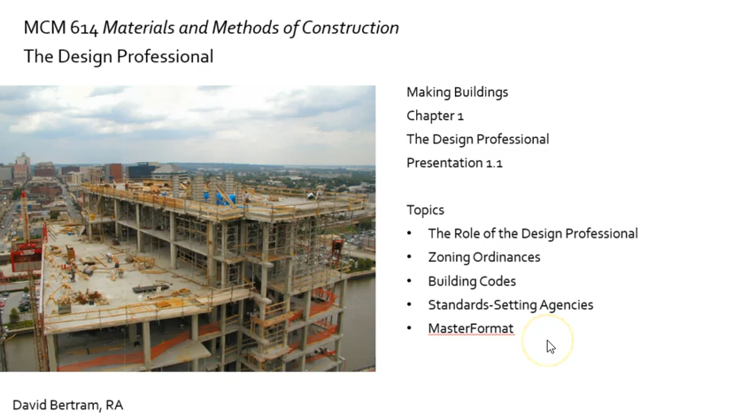When I come across videos that I think are interesting, I'd like to share them with you. This one, created by the AIA, the American Institute of Architects, called What Architects Do. Very good video, about 6-7 minutes. I'm not going to show you anything from it, and I wouldn't say anything on it is test worthy. If it ever is, I'd be more specific about what I thought was so great. But in general, it's a very good, informative video about the life of an architect, so to speak. Worth checking out if you're interested.

So, the role of the design professional. I looked at a couple of different team charts, just images off the web, not specific to anything, because I wanted to define exactly who the design professionals could be on a project in our business. These charts put a nice visual to it. Here we see an owner, and who's the design professional? It could be anyone here, I'd say architect, landscape architect, engineers. And this chart, which I know nothing about, also shows that the owner has a contract with the civil engineer separately, which could be the case.

Typically, the architect will hire and manage the engineers, but often the civil engineer comes in early, looking at the site and consulting directly with the owner. So also design professionals: engineer, and working with the engineer, we see a surveyor and an environmental engineer as well. So here I'd say 6 design professionals.

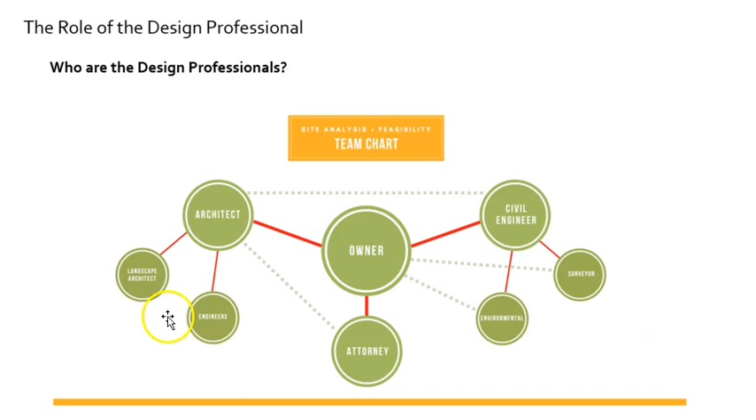Another one I saw, and again I know nothing about it, but let's take a quick look and point out who I'd say are the design professionals in this group. This looks like not a team organization, but a company organization. Up here we have the big wigs at the top, in the middle we have operational support, and over here there's the design team, the design leg of this operation. So we have a manager, and across the bottom here, all design professionals in my opinion.

So structural or civil engineer, abbreviated SE or CE, and I'll use these abbreviations throughout the term. Mechanical engineer, ME, responsible for air conditioning, heating, energy. EE, electrical engineer and communications, takes care of all your electrical; communications would be low voltage. Environmental engineer, the architect, the interior designer, the landscape designer, and drafting. So all design professionals in our business.

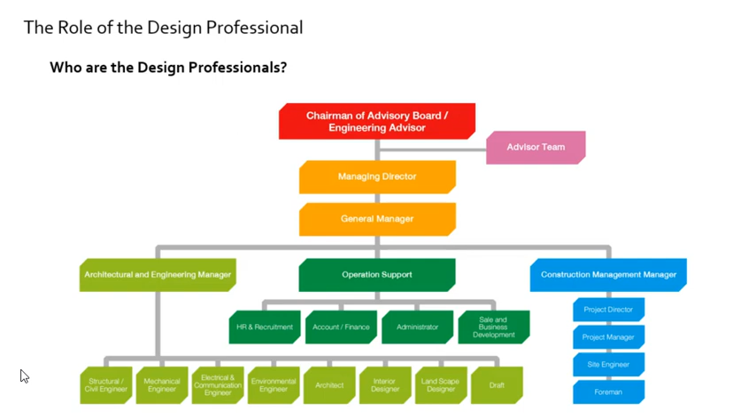Over here's the construction leg of this firm, so not the design professionals, but anybody in these professions. Typically our architects are registered architects, professionally licensed, and our engineers are PEs, professional engineers. So that's typically who the design professionals are, the licensed professionals.

Moving on, the next few slides are going to talk more specifically about architects, but as I just said, that's not the only design professional on the team by any means. Architects are licensed or registered in the jurisdiction where they work, same with engineers. They hold professional degrees, complete internships. Architects specifically take the ARE, and engineers have their equivalent exam as well, and they're involved in continuing education as they go.

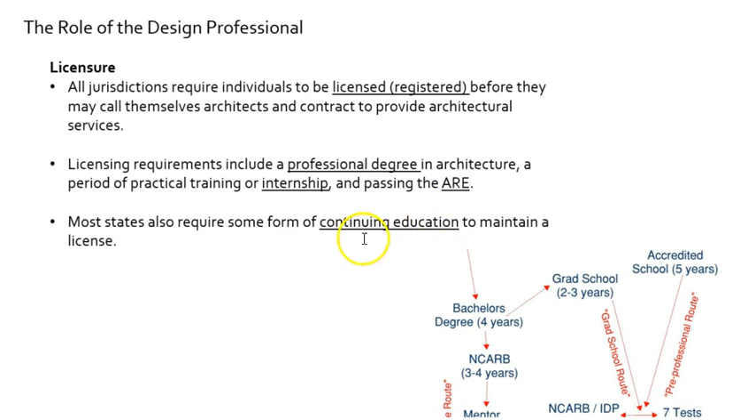In practice, what architects do: a commission given by a client could involve any number of behind-the-scenes tasks beforehand, before or in addition to designing buildings. So feasibility studies, just to see if an idea is going to work. Building audits—there are several different types of audits, could be for existing buildings. And the design of buildings, structures, and interior spaces.

Programming: architects need to figure out exactly what their clients' needs are, and then put that into a written format so it's understood, and that's what the design is based on. Just figuring out what's needed exactly. Some owners are experts themselves.

Institutional clients often know what they need and can present that to the architect, but first-time homeowners or home buyers designing a house from scratch would have no idea what they needed exactly. They might have a vaguer idea, but for specific requirements like square footage, the architects often have to work through that with their clients.

In general, the architect coordinates the design team. Typically, the engineers will be hired by the architect. Not always the case though. Some design-build operations could see general contractors at the top of the team, and then the architects are hired by them. Some teams, depending on project type, could also be engineer-led. So a variety of options.

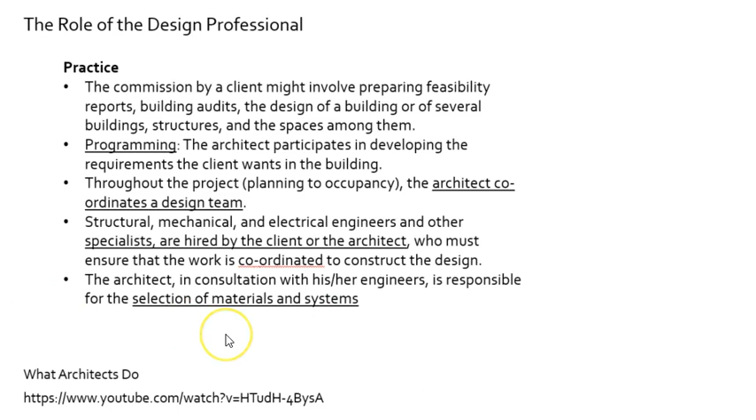For what we're dealing with, residences and commercial buildings, it's typically architect led. So here are other engineers who work with the architect. In general, it's this team, the architect and the engineers, that are responsible for the selection of materials and systems, which is what we will be studying this term.

Moving on. In general, the design professionals, architects and engineers, need to navigate the local and federal jurisdictions and interface with people in the zoning departments and the license and inspection departments. These are the people that give out the building permits and will inspect the work as it goes and then certify that it's up to code and is habitable.

Not until these people sign off on everything can it be occupied by the owner, who is typically the architects and engineers' client. So architects and engineers are hired for their expertise in dealing with the municipalities in this regard, regarding regulations and building codes.

A number of things fall into this. Right now they're bunched up here, and we're going to break them out from zoning to building codes shortly. So: setbacks, how far something needs to be from its property line; how tall it could be; how much parking is required; the amount of window required; and land use - are you allowed to build that type of building in this location? Big first question.

And then there's often a whole other layer of requirements that need to be addressed. Could be historic preservation guidelines. These are just a few of many, many requirements.

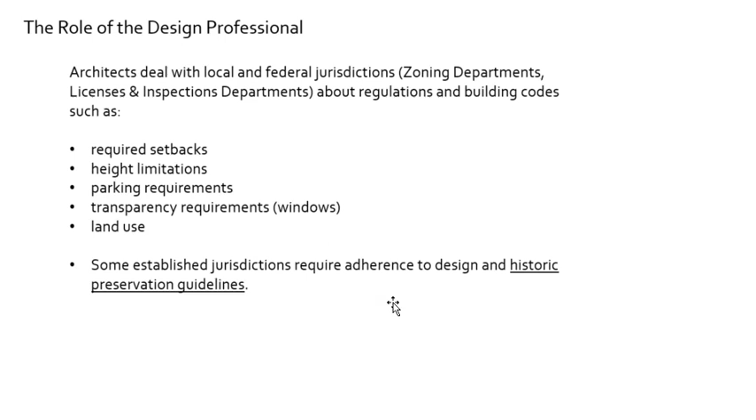During construction, the architects and engineers will often advise on the award. The architects and engineers have created the bid documents, which take the form of drawings - construction drawings - supplemented sometimes with specifications. That will be given out by the owner or put out for bid, and the bids will come in, and the design team could advise on the award of the bid.

They will review the progress of work during construction. They don't supervise the construction, but they could review the progress for the owner. If it's a large job and there are shop drawings and submittals created by the contractor, then the architect and engineering team would review those and say, yes, these shop drawings look good.

The architect would have drawn maybe some cabinetry, but then the cabinet maker would make the actual shop drawings from which they're being built, and the architect will review that and say, yes, you understood my intent - these are satisfactory - or we need to make some modifications.

The architect engineering team will also stay involved with construction administration. They will oversee basically the issues that need to be addressed in the contract, including payment, where they will review the progress and say to the client, yes, the builder has completed 80% of the concrete work, 20% of the walls, and that's what they should be paid for to date.

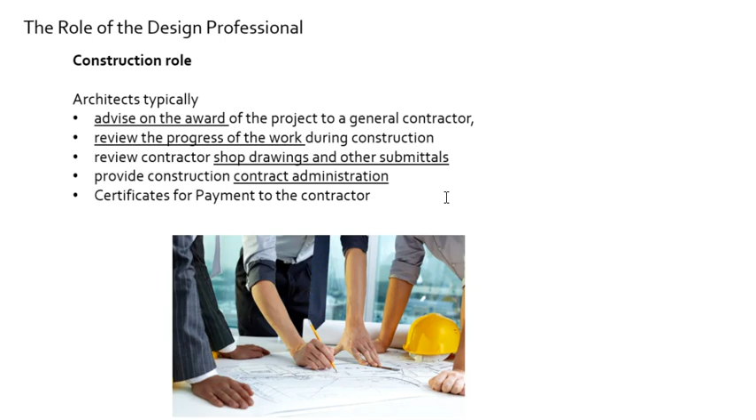So they could be very much involved after the fact. They don't have to be - not necessarily involved with construction - but they could be, remaining very involved. Again, on smaller projects they're less involved. On more complex projects, they stay involved for the owner and represent the owner.

All right, moving on to zoning ordinances. This is big picture, site level issues that the architects and engineers need to work through before designing actual buildings. So this is land use we're referring to.

What types of activities are actually allowed on this property - residential, commercial, industrial? All of this exists in zoning maps that the municipalities own and/or hold, and architects and engineers need to make that determination. Given the size of the property, given its location, what percentage could actually be covered in building?

How far does the building need to be kept off of neighboring property lines? What are the parking requirements? How big in terms of square footage and height can the building be? And are there special fire district requirements as well? So, big picture site issues.

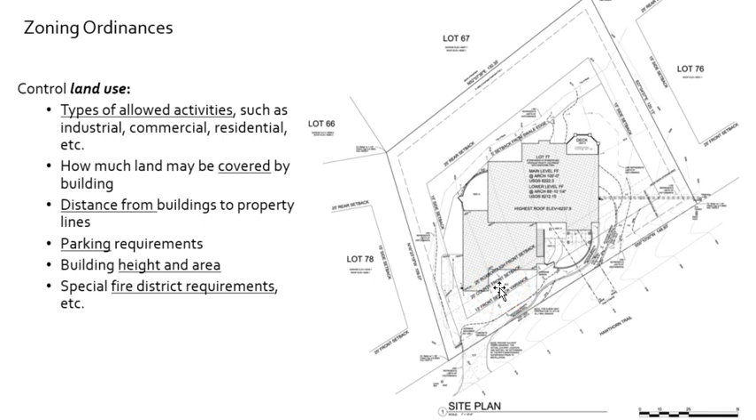Civil engineers would be involved with this. Architects would be - maybe not doing the research - but definitely communicating with the engineers and learning essentially from them what's possible, and then trying to see if they could work a building inside of that envelope and help determine with them if this is feasible. Can we fit the building we need with the parking we need on the site that we have?

Okay, on to building codes, different department.

So here in general, building codes specify the minimum standards for construction of buildings. They are not legally binding as they stand, a building code per se. They become law when a jurisdiction formally adopts them. We'll talk in a moment about model building codes, but a building code by itself is a third-party creation. The municipality will adopt it, and then it becomes an ordinance within that municipality.

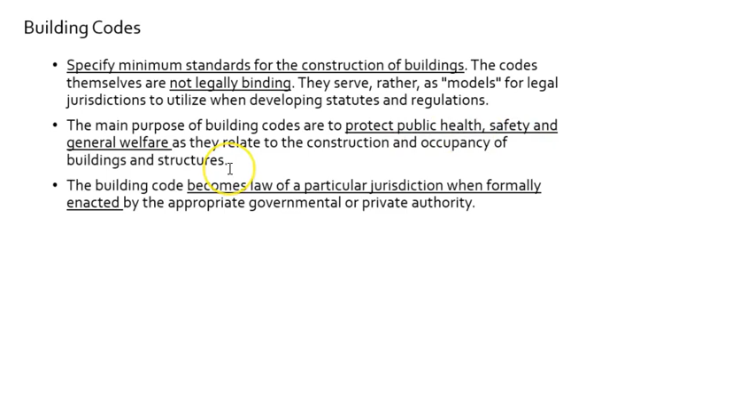They could adopt the building codes wholeheartedly and just take it all, accepting the 2014 version of that code and making it their own. Or they could modify it and publish an addendum saying they want these parts of the code to be more stringent, or they don't want these parts at all. So it could go in either direction. The general purpose is to protect the public health, safety, and general welfare of the occupants of the structure.

There are many different building codes. Model building codes are really what I just described - standardized codes that are adopted by jurisdictions or not, in full or in some capacity. The two big ones we're concerned with most for general construction is the International Building Code.

This applies to all building types except those covered in the International Residential Code, which covers 1- and 2-family houses, townhouses, and those types of houses up to a 3-story max. So these homes fall in the IRC. Anything that's not in the IRC is therefore in the IBC.

Then our engineers would be concerned with the more specific codes that apply to their fields. And on the right, these massive code books include several different things - building code occupancy classifications, which we're going to take a closer look at, construction types, building heights and areas, and numerous other pieces of information. It's a great niche to have, to be a code person in your office who really understands this, and you become a very valued team member.

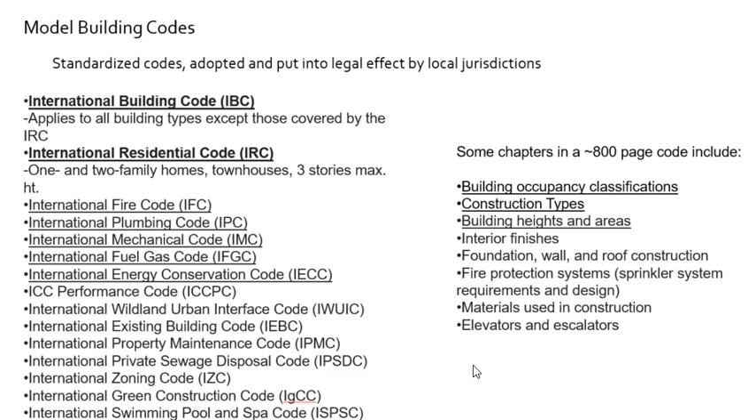Okay, so we're going to run through a couple of the parts now that we find in the code book. First are the IBC occupancy groups - this is the International Building Code. They impose this structure over all building types, and they define first things first is to figure out what type of building we're dealing with, then go into further detail as to what can and cannot happen, what is required of that building type.

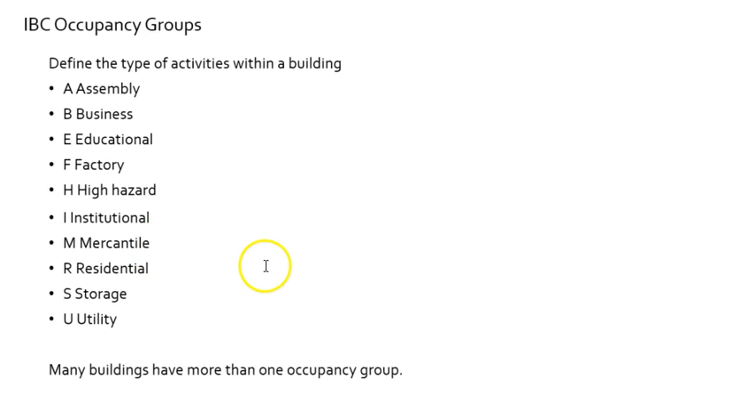So here are the different building types - type A, type B, type E, and so on. Every building type falls somewhere in here. Many building types have more than one occupancy group. So a shopping mall could have a theater in it, which could be an assembly area, and it could also have shopping. So it gets very complex.

Moving on, here are some examples with a little more detail about two particular occupancy groups. Definitions reflect the relative safety concerns of different types of activity - it's all about safety here. Occupancy group A is assembly. It includes theaters, auditoriums, lecture halls, nightclubs, and other places where the public will gather. In these types of spaces, large crowds in unfamiliar settings need special attention to emergency exit provisions.

There have been some tragedies in nightclubs, in particular, dealing with fires or shootings.

The whole issue of this building code exercise is to make these buildings safe. When the worst thing happens, how do these people get out safely? That is, in short, the heart of the matter for building codes.

Another one here, occupancy group I, for institutional: hospitals, prisons, other facilities where occupants cannot fend for themselves in an emergency. So during an emergency, these occupants cannot exit the facility by themselves, so they have to be provided with a protected area within the building. So in any building with a fire stairwell, if there's a fire and the elevators don't work, people in wheelchairs must be provided room inside the stairwell, and they cannot be in the way of people exiting through the stairwell, but they must be provided safe space to wait until help arrives. That's called an area of refuge.

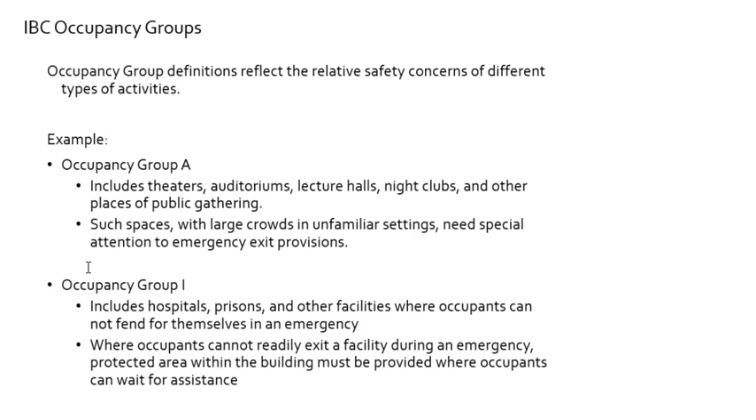All right, so these are just two little more detailed examples of the great attention to detail and requirements that is required of building codes. Okay, moving on.

So now construction types, a different structure that's applied to buildings within the IBC. They define building construction type relative to varying degrees of fire resistance. Here is type 5, which is combustible wood frame construction. This is the least fire resistant.

Getting better than that is type 4, heavy timber construction. So not small dimensional 2x lumber, but heavy timbers. It doesn't burn as quickly, it chars and doesn't burn, so it's better.

If there's a non-combustible exterior, stone, brick, now you're moving into type 3. Non-combustible exterior and other components is type 2. This is broken down in a ton of detail within the codes, but we'll keep it simple. Type 1 is non-combustible materials, and the structure is non-combustible as well. So those are the 5 types, the 5 levels of construction, associated with the 5 levels of fire resistance.

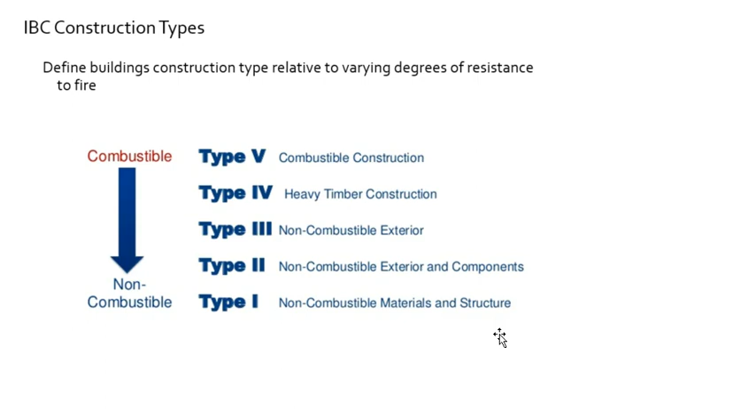Okay, so we've established something here on our chart, a height and a square footage, and now we want to make some modifications to improve it. Providing greater firefighter access around the building, getting trucks around the building, improves things and increases the building size. Increasing the building height, however, will make a reduction of floor area, so that's something else to be considered.

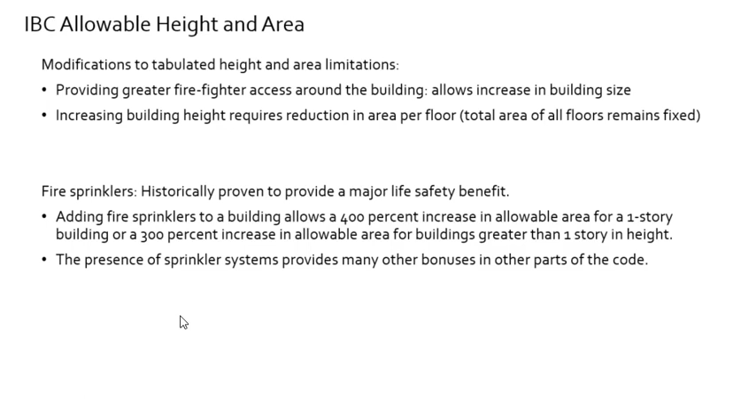Suffice to say that, and this last bullet is important: the presence of sprinkler systems provides many other bonuses in other parts of the code. So here we are just at the very beginning of this 900 page code book, and all we're trying to do is figure out how big of a building we can make, how tall and how wide. There are many more chapters coming concerning floors and construction of walls, and if these sprinklers are already in place, there will be more benefits later as we work through other tables. We're not going to do that in this class, this is all we'll touch on in terms of code. But just so you know, a full code review is a lengthy process moving from chapter to chapter, and the sprinkler systems help.

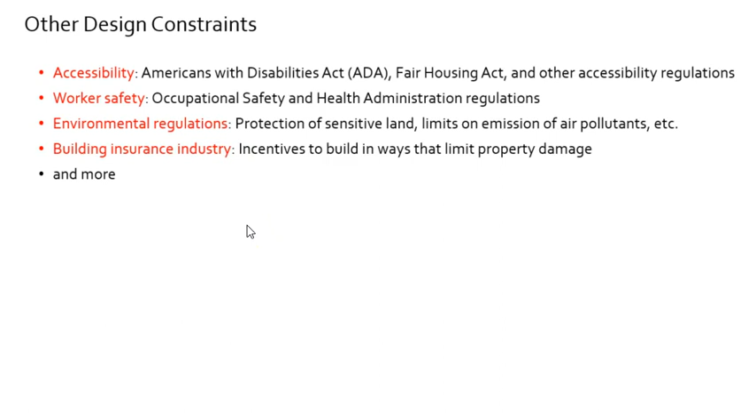Okay, other design constraints. So that is our code from the municipality, and then there are other layers. Accessibility - this is a federal law, the ADA, the Americans with Disabilities Act, a federal law that's non-negotiable. If you're doing commercial buildings, you will know it and design to meet that. OSHA is very important as well, this is all things safety - OSHA, environmental regulations. Building insurance could also have layers put upon it; in order to get insurance, certain standards have to be met. So these are other design constraints the design team has to work with from the beginning.

The UL, the Underwriters Laboratory, I want to say a few things about. It's definitely something a designer would become acquainted with quickly in an office. They test everything - manufacturers come to them to have their assemblies tested. A product is drywall, a product is a steel stud, a product is insulation; when they come together they form an assembly. The manufacturers will prove to themselves first that this assembly will be a 1-hour fire-rated assembly, then they will pay the people at the Underwriters Lab to build and test this assembly, to light it on fire and test it.

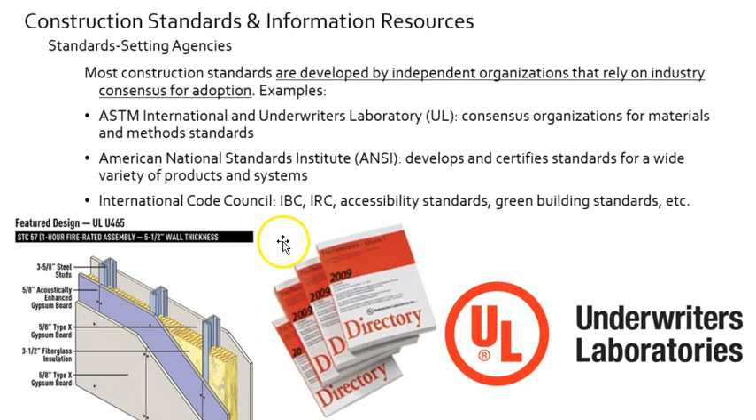Moving on. Now we will talk about the master format. I think this is the last piece of our lecture here. A few more slides on the master format, a master list of 50 divisions.

This is basically a big index of all the materials we're going to be studying. They live somewhere in this index, and this index allows designers to communicate clearly with builders, who communicate clearly with manufacturers. Everybody involved needs to know where that particular piece of hardware lives. It needs a description in the index so we all know where to classify and categorize it in whichever documents we're creating or reading.

We are not going to use this for this class, in that I'm not going to refer to the division that it falls in. Rarely would I. But in professional practice, on the design side, the construction side, anywhere you live in this business, you will need to know this.

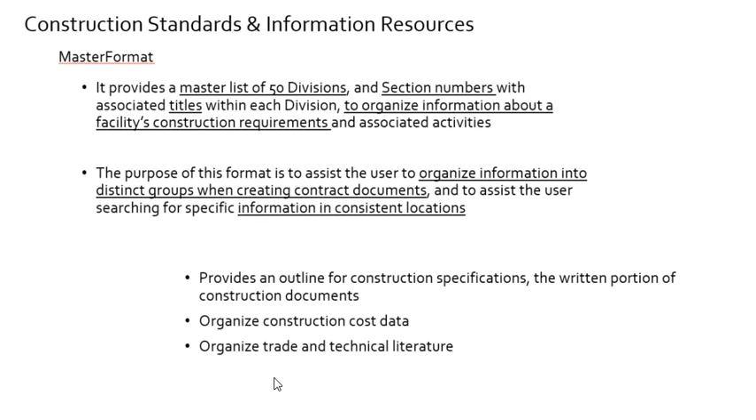Okay, this will quickly show us how deep these many divisions go. Here are the divisions again, 2 through 14, then we'll skip a couple. So we have concrete, metals, woods. Here we're getting more into equipment.

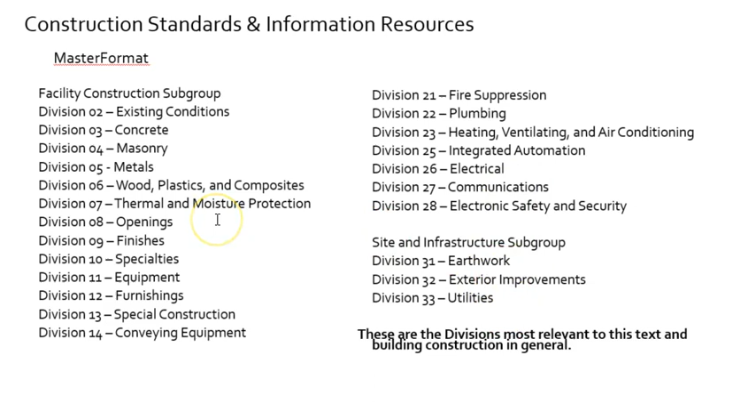Conveying equipment would be our elevators and escalators. Then we get into our engineers here: mechanical, electrical, plumbing, communications, and then out here we have some exterior work. Just a quick review of them, and then those break down and break down further.

So everything has a home and it's buried in there, but there's a logic to it, and once you become familiar with it, it's very easy. It makes life manageable. So buried inside of metals, vertical metal ladders.

All right, and that is the final slide. Thank you for your attention to that. I know it's a lot of information, I know it's text heavy. Fortunately for everybody moving forward after this week, we'll be looking at a lot more images, as I discussed in the introductory video, drawings and photographs of buildings. That's really the heart of the matter, but this background is super important. I hope you enjoyed this one.

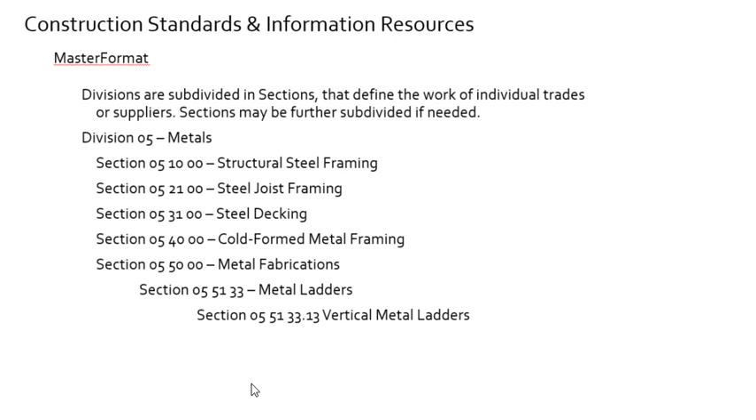Next, we're going to move on to the construction professional and what life looks like from their vantage point. Thank you.